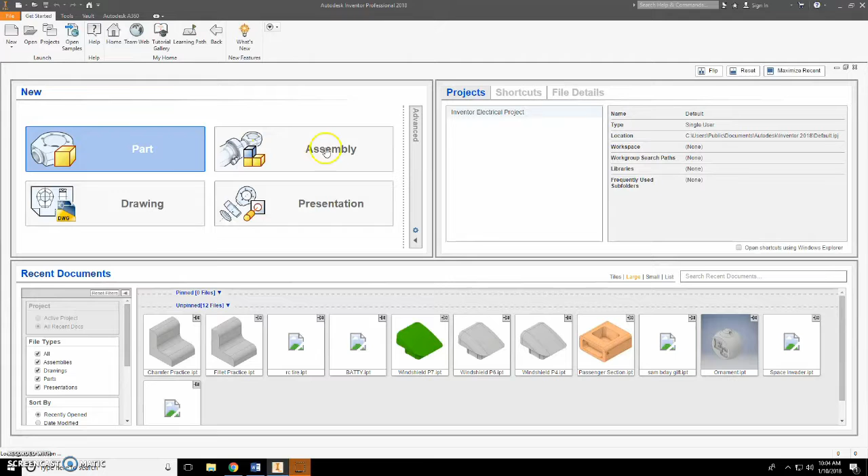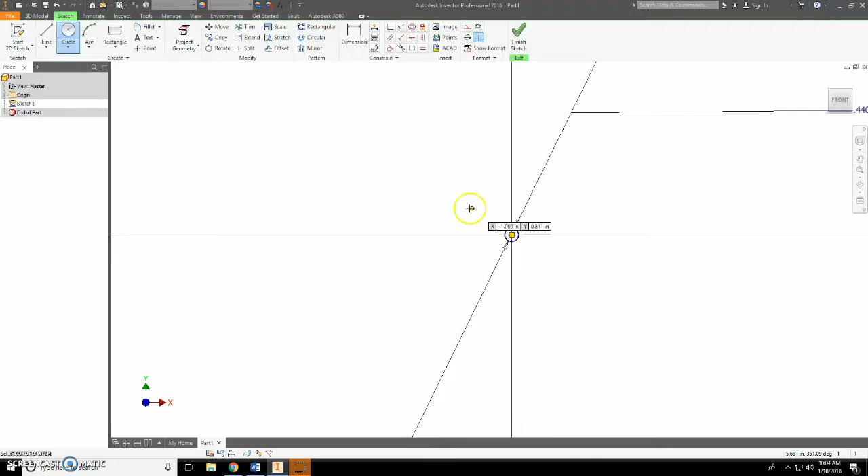Start a new part, and on your XY plane, we're going to make our 0.44 circle using the circle tool. This first one is going to be 0.44. That's what we want.

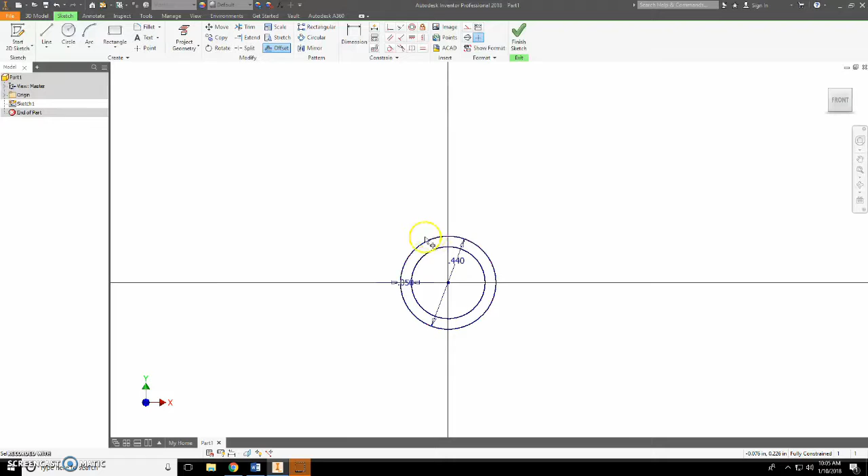Now we're going to use the offset tool, which should be over here. With the offset tool, I'm going to click on the circle and go inside 0.05. So there's that wall. We're going to go out here 0.35, and then out one more 0.05. That should give us our outside wall and our inside wall for the rings. Let's go ahead and finish the sketch.

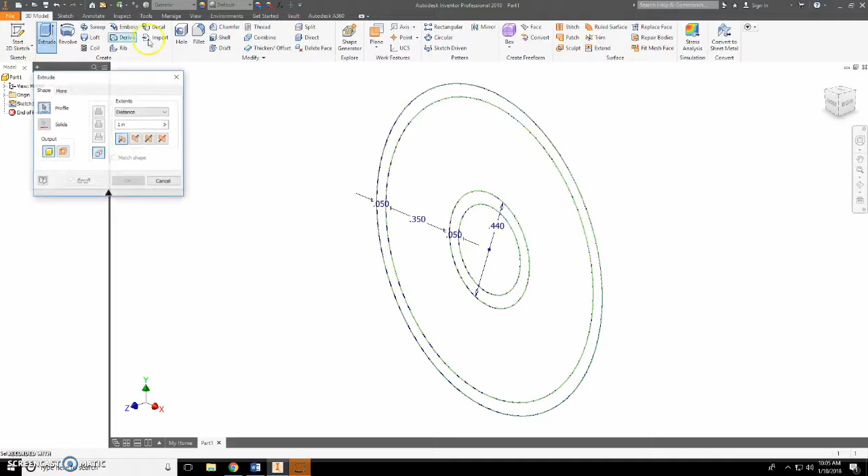Our instructions say to extrude it 0.57, so I'll extrude 0.57 for our distance. We'll extrude the outside ring and the inside ring, just like that. So there's the basis of our wheel. That's what we want for now.

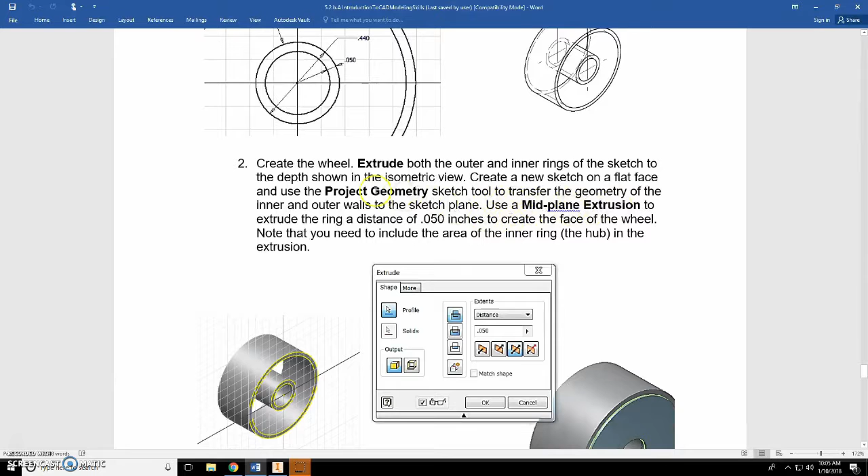If you go back to the instructions, we are going to use something called a mid-plane extrusion, and we're also going to use project geometry to get all of these different lines here. Once we get these lines, we will do the mid-plane extrusion to a distance of 0.05 inches to create the face of the wheel. Let's go back to our inventor.

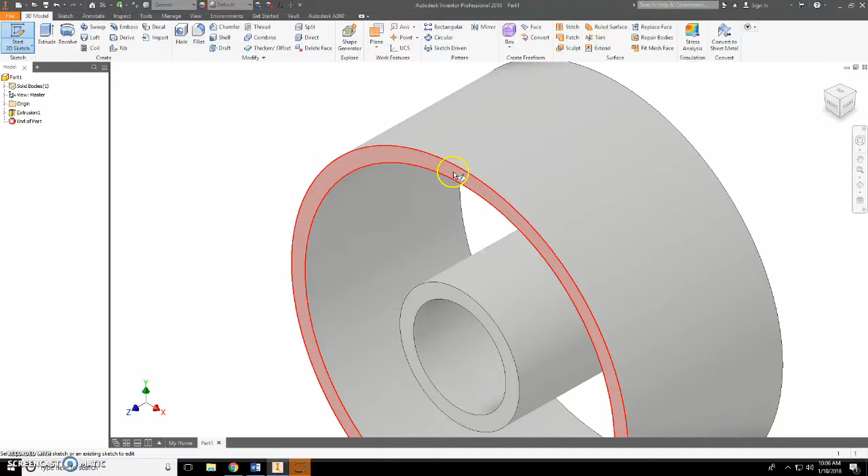We're going to start a new 2D sketch. Click on this flat surface of the ring. We're going to use the project geometry tool to get the circles. We'll just click on the two faces here to get all the yellow lines. I'll finish our sketch.

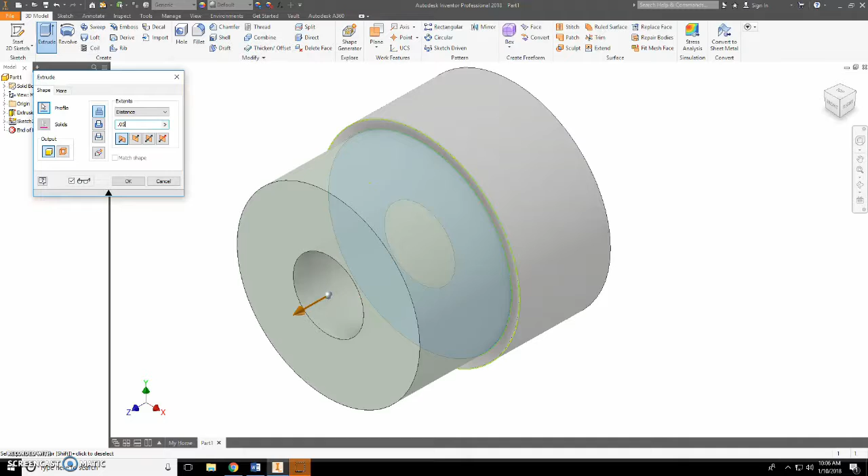Extrude. I'm going to click on the center ring, and we're going to change this distance to 0.05. We're also going to go to a mid-plane extrusion, which will be right here, symmetric. That sets it back so that it's attached, at least, to the two walls. Go ahead and click OK. That's what we've got so far.

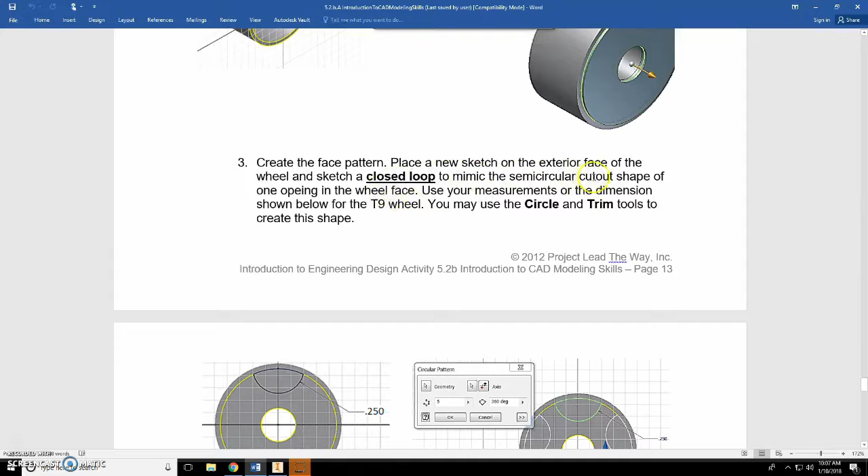Let's go back to our instructions here. Next, we're going to have to create the face pattern. We're going to place the new sketch on the exterior face of that wheel, and we're going to make a closed loop to mimic a semicircular cutout of the wheel opening.

So we're just going to make a circle here, 0.25 from the edge, placing our circle on the intersection here. We're going to cut that circle, and then use the circular pattern to cut that out. Let me go back to our inventor. We're going to start a new sketch, click on this face here, and start a circle.

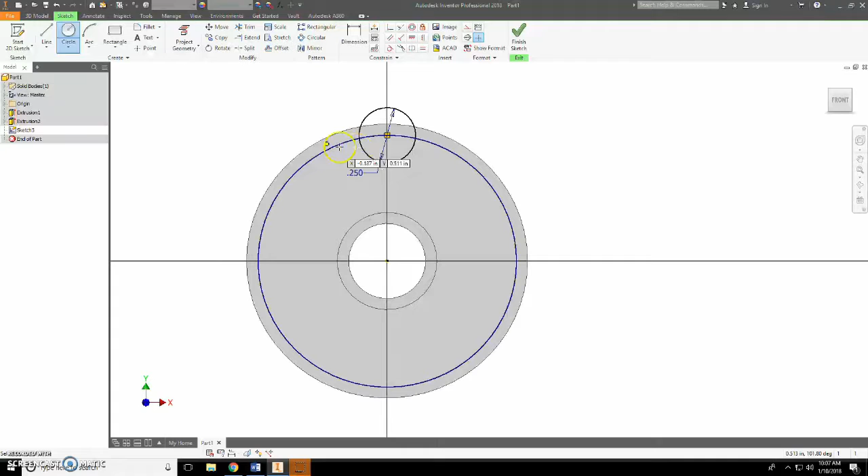Usually when I do this, 0.25 doesn't seem very big, so that's probably the radius. Let's go with 0.5 for the circle. That looks quite a bit better, so let's stay with 0.5.

We're going to trim it. Click on trim, or press X on your keyboard, and trim this outside circle here. That'll just leave us this inside circle that we want. Then I'm going to go ahead and click OK, finish sketch.

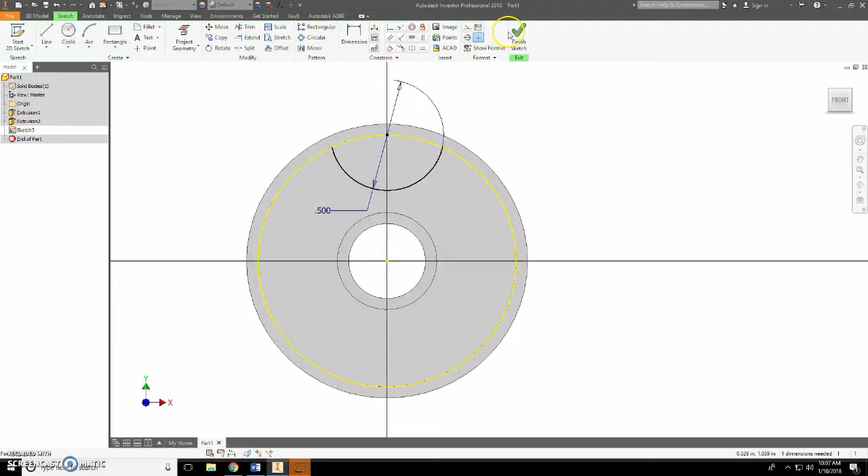We're going to extrude and cut just this piece off. We'll cut it off, and we're going to click OK. So now we've got that cutout piece right here.

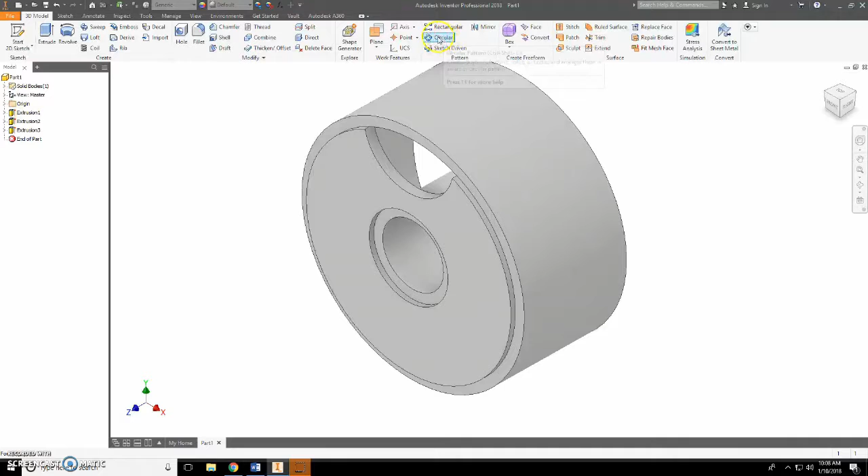Finally, in order to make this cutout go all the way around, we use a circular tool. Click on the circular pattern tool up here. We're going to click on the piece that we want to copy, go to rotation axis, and click on anything that's rounded in here. Anything that has the same axis is fine.

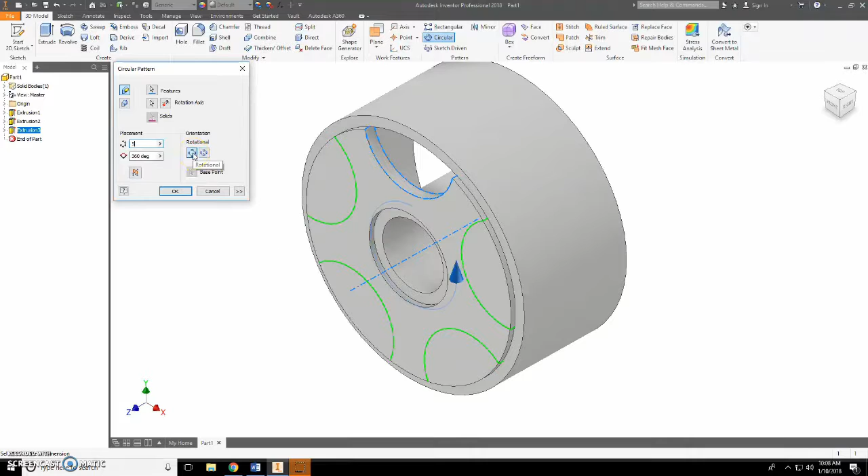I think we only want 5 — 1, 2, 3, 4, 5. Yep, so we're going to do 5 iterations of it. We're going to go all 360 degrees, and rotate direction. Go ahead and click OK. And now it cuts out all 5 of those holes for us.

That's pretty easy, pretty simple part. I think you guys will be able to get this done today. Good luck, and we'll see how this works.